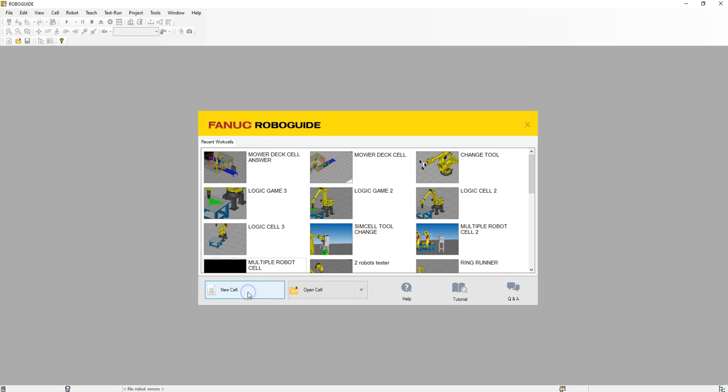But first I'm going to set up the cell, so I'm going to go to New Cell, and we're going to use Handling Pro. Let's call it Cell Creation Mower Deck. Pick your version that you want to work with. We're not going to work with any end of arm tooling, so set end of arm tooling later. Hit next.

Hit next on the servos, and next again, all the way to the finish and run through. Allow the teach pendant to initialize. When it gets to the flange selection, we're just going to do 1.

And allow the cell to set up. Alright, so in the link below, there's a link to the Google Drive. If you have not done so already, make sure you download all the CAD files, including the PDF that walks you through everything we do in this video. The link will take you to the CAD folder, just hold Shift on all of them, right click, and then download.

It will zip everything, and we want to make sure all these files go into the robot cells folder. So while this is zipping and downloading, I'm going to pause, and then I'll show you how to put it into the folder.

Once you have the cell downloaded, just unzip the folder, and then find the folder under your work cells of the actual name. So I named mine Cell Creation Mower Deck, and I'm going to paste this folder inside here.

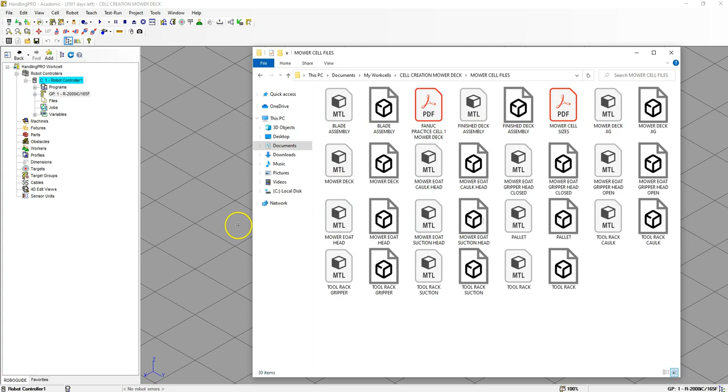Now I have my files, so this is all the files we need inside the cell. So walking through the PDF that we downloaded as well, we downloaded the robot, and now let's start moving into the parts.

First thing we're going to do is bring in the blade assemblies, and it's the same CAD file, but we need 3 separate ones because we need to pick and place 3 separate items: finish deck assembly, mower deck assembly, and the mower EOAT head, which will help us with the pick and place off of the tool rack.

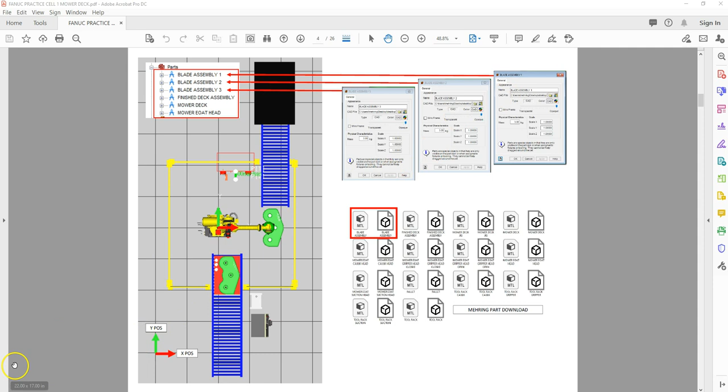So let's download those and add them to our parts file. You'll see inside our file here are all the weights. We're not going to do anything with scales or with color. The mass is 3 kilograms, and that's our blade assembly we're going to download.

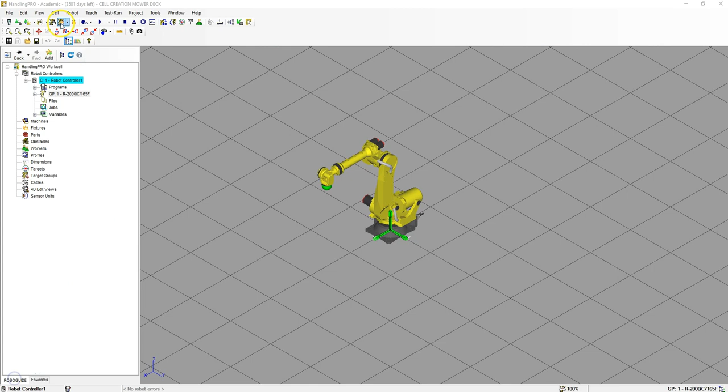Let's go inside here. We can either go up to Cell, Parts, or right click on Parts and Add Part, and we're going to go from Single CAD Library. Let's find our cell, and inside that cell go into the folder with our CAD files. Here's our finished blade assembly. Hit open, and you'll see our blade assembly.

Again, we're not doing anything with the scale, and each one of these weighs 3 kilograms. So we're going to call this blade assembly number 1, hit apply, and then let's do that 2 more times. Now we have 3 blade assemblies.

So the next part is the mower EOAT head. Again, we are not worried about the mass of this, this is just helping us for setup and placement.

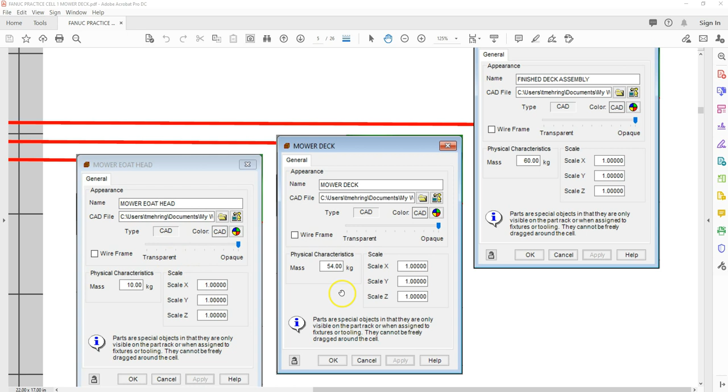Then we have the mower deck, which is 54 kilograms, and the finished deck assembly, which is 60 kilograms, because that's with all the additional items, including some bolts and caulk. So let's add these 3 items to our RoboGuide.

We're going to right click, Parts, Add Part, Single CAD Library, and we are going to go Finish Deck Assembly. There's our finished deck assembly with all the parts. This was 60 kilograms. Hit OK.

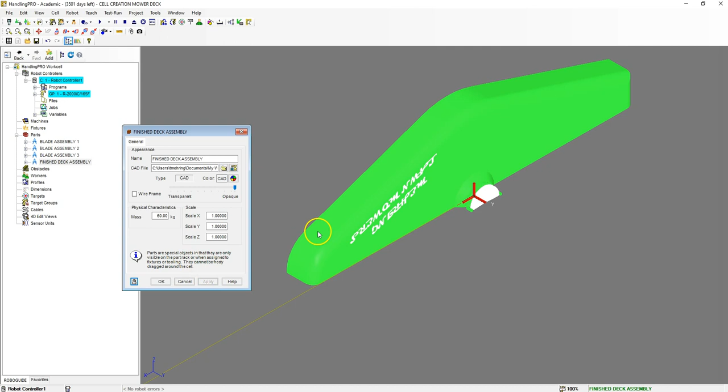Add Part, Single CAD Library, and then we're going to have the actual mower deck, and this is going to be 54 kilograms. The last one we're going to do is the mower EOAT head, so that's just the head by itself.

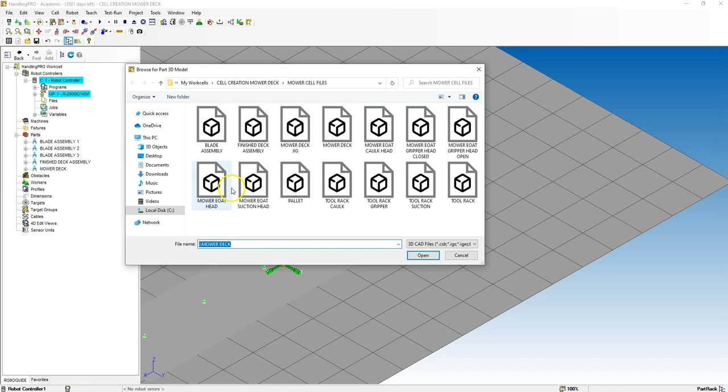By itself, again, we're not worried about the mass because we're only using this for setup and move to. Hit OK. So now we have our 6 different items all set up for our parts. So our parts now match the cell that you saw in the PDF.

Okay, next, I do not want to see all these off to the side. So if you double click the actual rectangle or square, this will pop up as the part rack. So we're going to uncheck visibility and we're going to hit OK. And that takes away the entire part rack. We don't need to see that.

Let's start adding the end of arm tooling. Let's hit the plus next to the R-2000iC/165F robot, find tooling. And our first tool is going to be just the gripper head. So we're going to right click on it. We're going to go EOAT1 properties. And the name of this, we're going to go no EOAT.

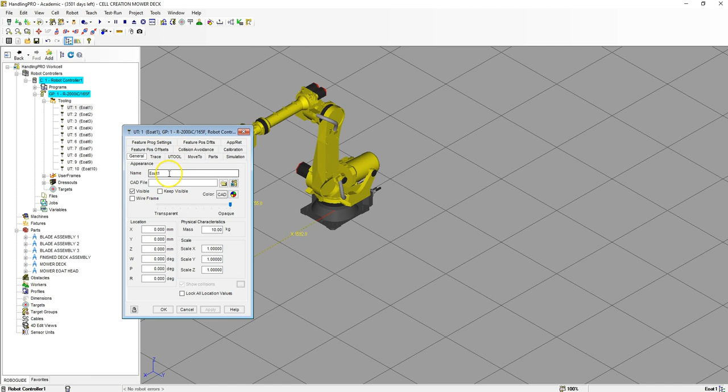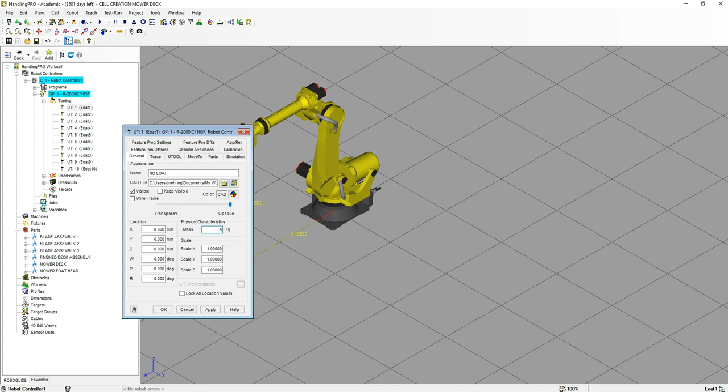And here's the CAD file. We're going to find the CAD file that we need. So this is going to be the Mower EOAT head by itself. And we're not going to do any of these items. The physical characteristics were usually right around 2-3 kilograms for the weight of this. It could be a little bit more for sure. We can just go 6 kilograms for this item. And when I hit apply, you should now see the EOT at the end.

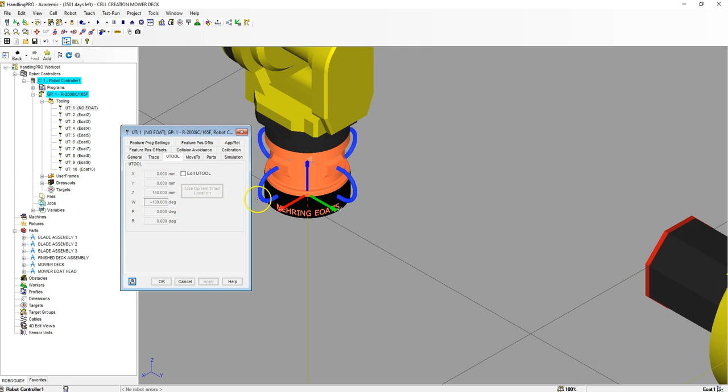Let's go to U tool. And for the U tool, let's go edit tool, and we're going to go right down to the bottom, which is going to be 150 millimeters. And then we're going to also rotate it -180. So now our X and Y matches the triad for the world mode as well. There's going to be no parts or simulation for this, so we don't have to worry about that. So now we have our head by itself.

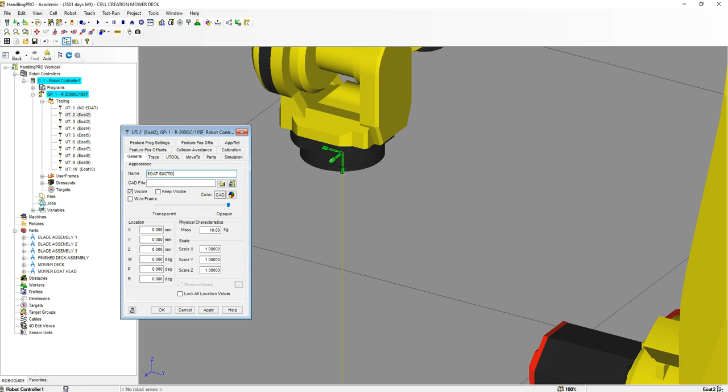So let's go to U tool number 2 and let's go properties. And let's call this one EOAT suction. So let's go to general. Let's find the CAD file and it'll bring us right to here. So we're going to go EOT and suction head, Mower EOAT, suction head. And when I hit apply, you should be able to see our item.

Let's go to U tool and edit U tool. The U tool Z is going to be 230. And we're also going to do that rotation of -180 degrees. And down there, we now have our rotation correct. Now it's off to the side like that because of how the mower deck is built and the weight of the mower deck. So it's not going to be exactly in line with our triad.

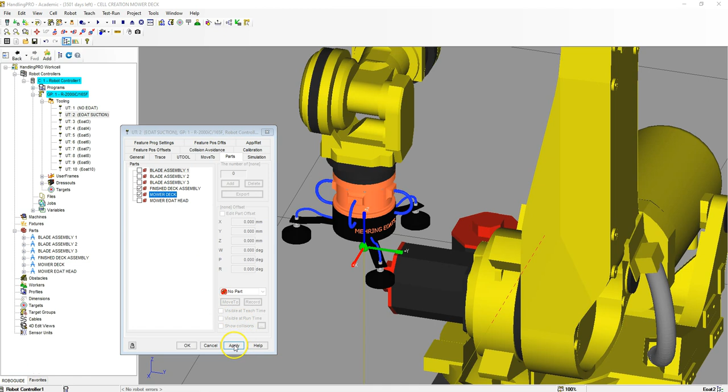Let's move down to parts. This one will be picking up parts. So we are going to pick up the finished deck assembly and also the mower deck with this. So with the mower deck, when we hit apply, we should see this. Now we need to edit this, so click it again, edit part offset. 230 is good. We need the W to be 90 and then the R to be -90 to get it to where we want it to be. And when I hit apply, we're good with that one.

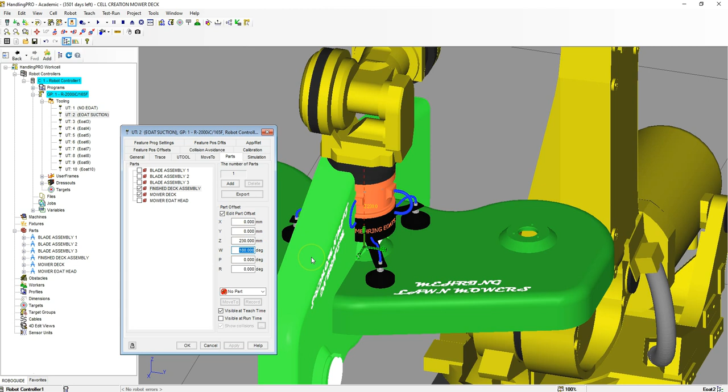Now let's do the exact same thing for the finish deck. So let's click the finish deck, edit part offset, and the exact same thing, 90 and -90. And because it's upside down, let's just rotate this 180 degrees. And then we're going to have to flip it so that it's not negative. And then it should match. So I went 230, 90, 180, 90. So just a positive 90 from what the other mower deck is.

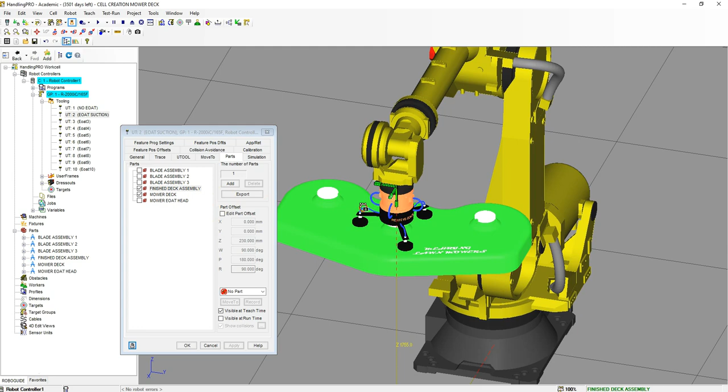So this is the one that is finished. So as soon as we start adding the parts, this is what's going to get picked up and put onto the final conveyor belt. Then both of these should be defaulted as visible at teach time, so just double check that it is. For simulation, we should not see anything else inside here. It's just a static tool. So let's hit OK, and this EOT is now set up.

Let's go to U tool number 3, EOT properties, and this is going to be our caulk gun. So let's go to general, CAD file, and we're going to go to EOT, Mower EOAT caulk head, and then we're going to change the weight to say 4 or 5 kilograms for the weight of our EOT, and when I hit apply, you should see it now pop up.

Next, let's go to the U tool, set up the U tool. Z is going to be 302.1.

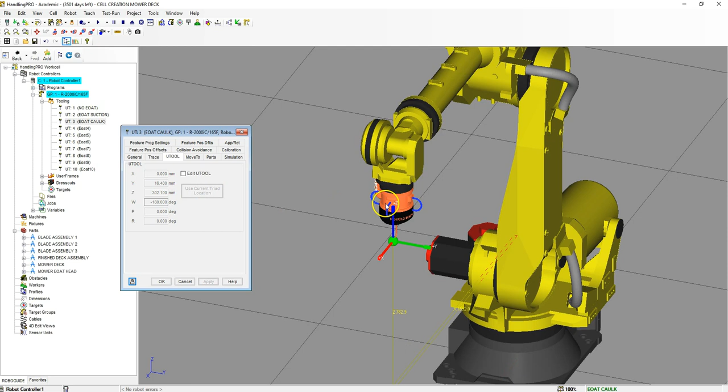The Y is going to be 16.4, and then we're going to have a W -180 degrees rotation. So now we have our U tool at the end where the caulk should be at, so we can run along the lines.

So we have our caulk gun. We do not have to do anything for parts. That's not picking up anything. It's just placing a bead of caulk, and also the simulation is not doing anything as well. So the caulk gun is now done. Let's now move on to the final one, which is the gripper.

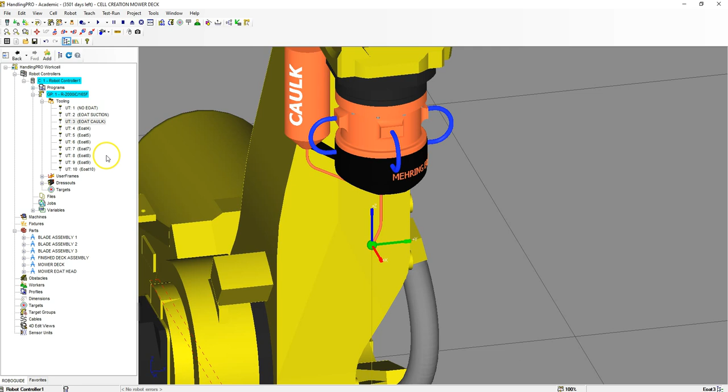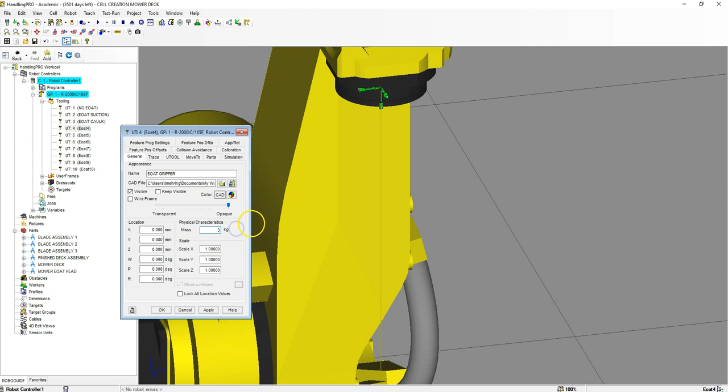So U-tool number 4, right click on it, and we're going to go EOAT number 4 properties, general, and let's call it what it is, EOAT gripper. CAD file. Let's grab the CAD file. Now there's 2 CAD files. There's one open and closed. So make sure you grab the open first. There's nothing for the size. This is going to be a little bit lighter, so we'll say 3 kilograms for that. Size is all good. We don't have to do any rotations.

Let's change the U-tool. Let's go to U-tool, edit U-tool, and we're going to have a Z of 181.515. And then for our rotation, negative 180 degrees, and now we have our rotation correct. X, Y, and Z triad is all correct as well. Let's move to the parts.

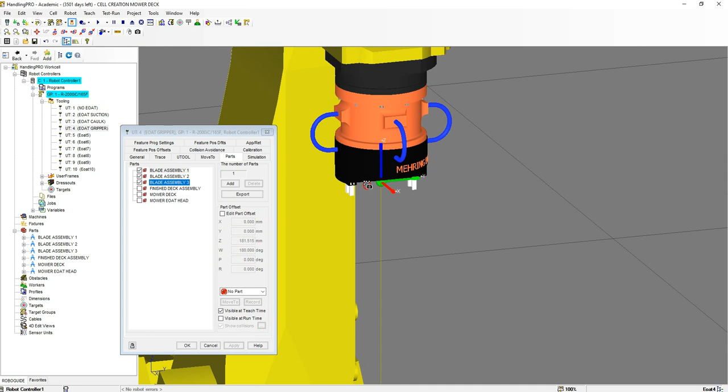Inside the parts, we are going to pick up all 3 blade assemblies, making sure that we hit apply on that. So we have all 3. Visible at runtime is unchecked, and we're not going to do anything with the edit offsets. So let's make sure that all these blade assemblies are zeros. So go inside here, 0, 0, apply, and now it's the correct direction.

Do the same thing for number 2, edit direction. Make sure that these are 0 all the way down, and you should be able to see it once you do that. So click assembly number 1 and go zeros all the way down. Blade assembly number 1, number 2, and number 3 should all be in the exact same place. All of them should say visible at runtime to be unchecked.

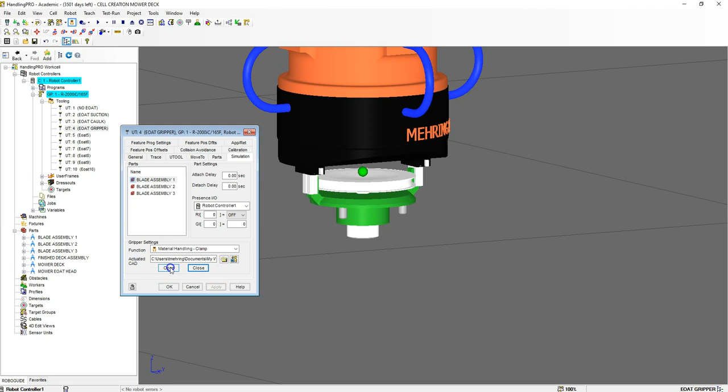And then we're going to go to simulation. And inside simulation, we are going to now switch this to a gripper style. So function, switch this to gripper, clamp, and then the actuated CAD file. We're going to go to closed EOAT, open, hit apply, and now I can go open, closed, open, closed. So they're 2 different CAD files, one open, one closed. And everything's set up on the simulation part. So hit OK, and now all our toolings are now all correct.

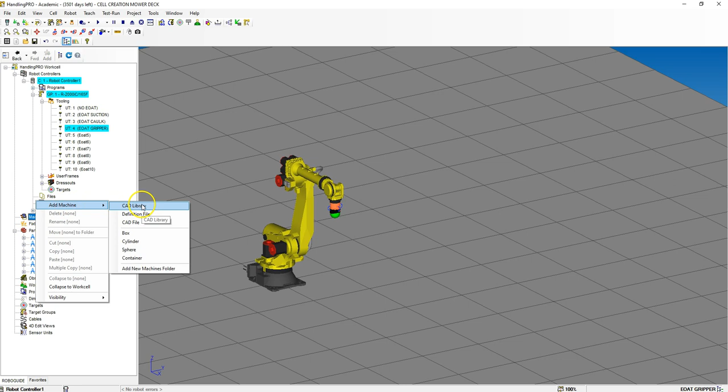Next, let's start on the machines. So we're going to add a machine. So right click on machines, add machine. Let's go to the CAD library, and we're going to find the conveyor belt. So it won't be under machines. We actually have to go under fixtures. Then go under conveyor, and it's going to be just the conveyor belt. Hit OK.

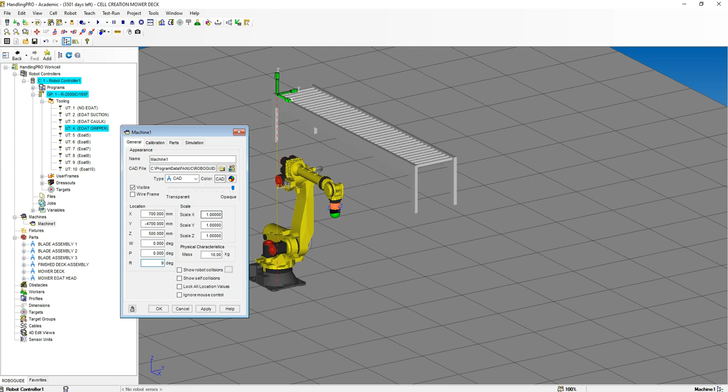And then let's change the location sizes. So X is going to be 700. Y is going to be negative 4,700. The Z is going to be 500. The W is 0. P is 0. And then R is 90. And when I hit apply on this, it should be in the correct area.

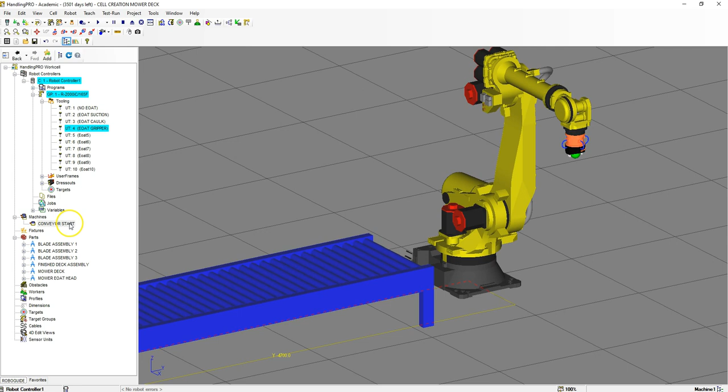Next, let's change the scale, and the Y scale needs to be 1.3 just to make it a little bit wider. And all these numbers should remain the same when we do that. Let's change the color of this to blue, and I'm going to hit apply. And now we have our piece in the correct area. We can lock all locations for this. And let's just rename it. So this is going to be our starting conveyor. We'll come back and add the actual machine parts that move after we get all the machines loaded.

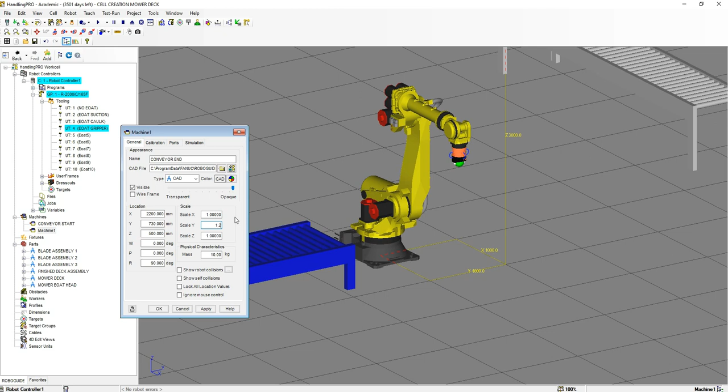So let's add another machine. This one is going to be our end conveyor. So let's go to fixtures and find our conveyors. There's our CNVYR. Hit OK. And let's put in the correct sizes and the name. So we'll just go conveyor end, and we're going to go 2200, 2200, 730, 500, 0, 90, and we're going to go scale of 1.2 for the Y. And when I hit apply, it should be in the correct place.

And then let's change the color to blue as well. And we'll lock locations and values. Okay. So now we have our second conveyor. Now we need to put in our parts rack.

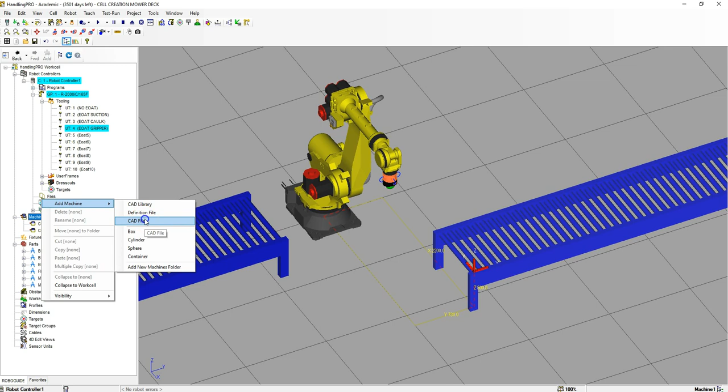So let's add another machine. And this one I'm going to go to CAD file, and I'm going to find my tool rack. And we're going to put in the X of 550, Y of 1800, Z of 0, W 90, and everything else is good. Mass doesn't matter. And CAD color can work. Lock location values and hit OK.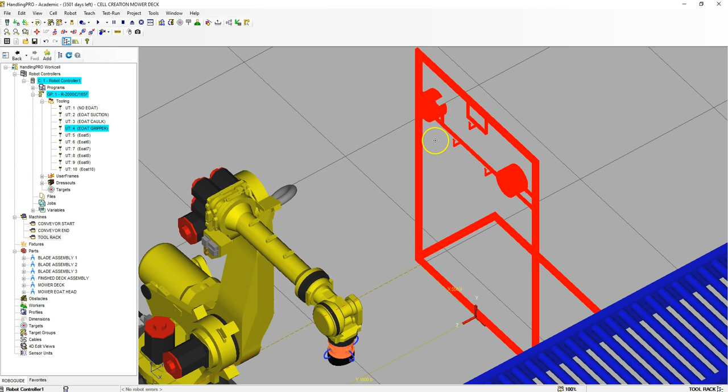So now that we have our machine fixtures, anything that needs to have moving parts needs to be a machine. Fixtures is just an item that is stagnant. If we want something to move down a conveyor belt, it needs to be a machine. If we want to have a tool show up or disappear, it needs to be a machine. So it has to be associated with a machine. We will add the links to these machines after we add the fixture parts.

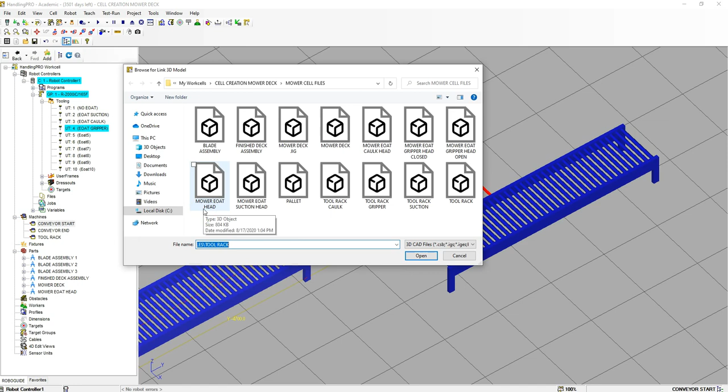Now that we have our machines in, let's add our parts that will actually move on the machine. So let's go to Conveyor Start, right click on it, add link, and this is going to be a CAD file. And we are going to find the pallet. So here's our CAD file. We want to make sure that this is the X-axis when we rotate this. Let's call this pallet.

Hit apply. For our general, these are all going to be zeros. Okay, so this is not associated with the rotation of this, so don't get used to the general. We actually have to go to the link CAD to modify the rotation of that. So let's go to link CAD.

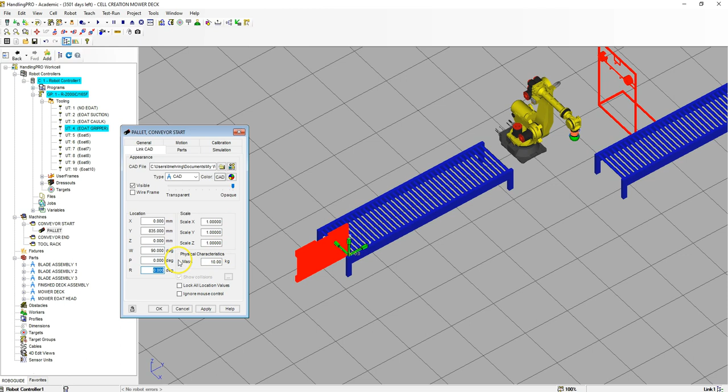And then let's go down. The X is going to be 0, the Y is going to be 835, Z is going to be 0. Rotation on the W is going to be 90, 0, 0. And when I hit apply, now it should be the correct rotation.

Let's add our link. So we're going to go to parts, and we're going to have blade assembly 1, 2, and 3, and then the mower deck. So let's do the assemblies first. I'm going to go to blade assembly number 1, and these are going to be our numbers: negative 140, 290, 72.5, 90, 90, 0. When I hit apply, it should be in that first correct part.

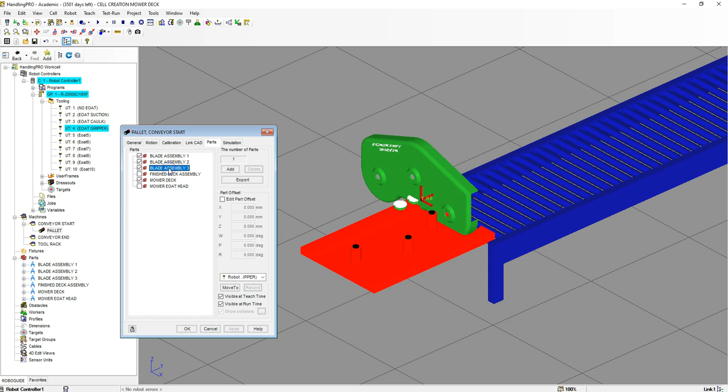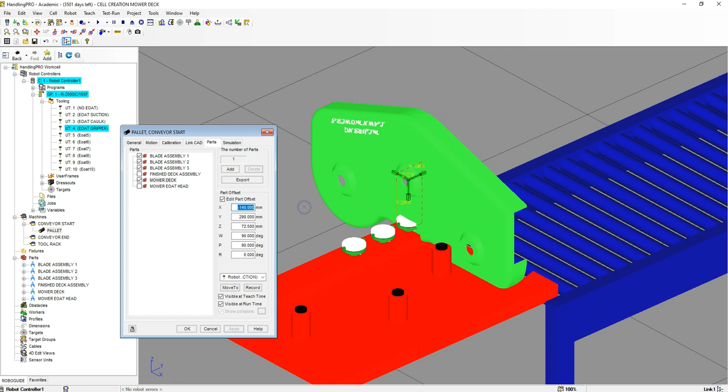So now let's go to apply, mower deck. Let's hit the edit offset, and the mower deck is going to be negative 616.95 for our X, 120 for our Y, and 533.050 for the Z, and then we're going to have 180, 0, 0. And then it should be in the correct place. And we're going to hit apply. And these are going to be visible at runtime for all of these.

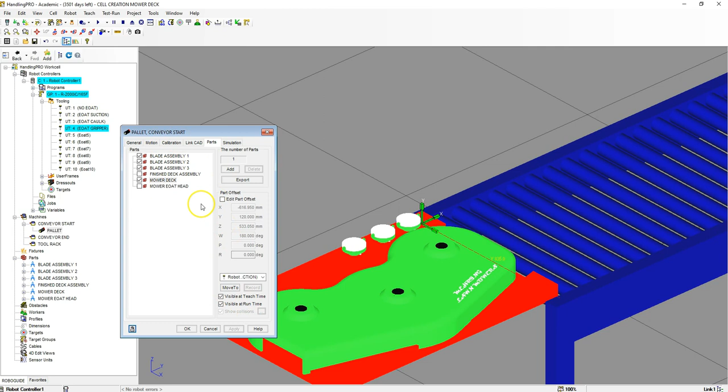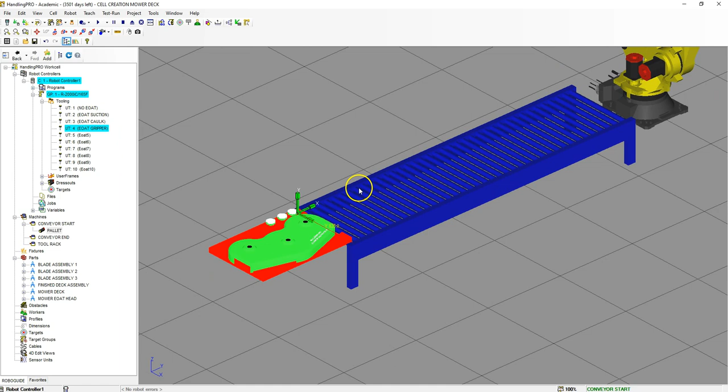And then all of these are going to be picked up. So let's go to simulation and make sure that all of these are going to be picked. So pick, pick, pick, pick, and we're going to hit apply. So all of them should be allowed to pick up, not to be placed. Hit OK. So now this assembly is correct. Now that we have the simulations done, which is allowed to be picked, let's go to motion.

And inside motion, we're going to do an in and out control linear, and the speeds are going to be 500 going towards, and then it's going to warp back. So we're going to go the largest number we can. And then we're going to go to robot controller number 1. And these are going to be our I/O tags.

So it's going to be digital output number 1 and digital output number 1. One is going to be on, one is going to be off. So when it's on, it's going to be at 1230. And then when it's off, it's going to be at 3800.

So you can test where these locations are. There's the location. There's the location. Now what we need to do is add our inputs so that when it is in location, it will tell us when it's in location. So digital input number 1, digital input number 2, when it is at 1230, which makes sure it double matches here, it's going to turn digital input number 1 on.

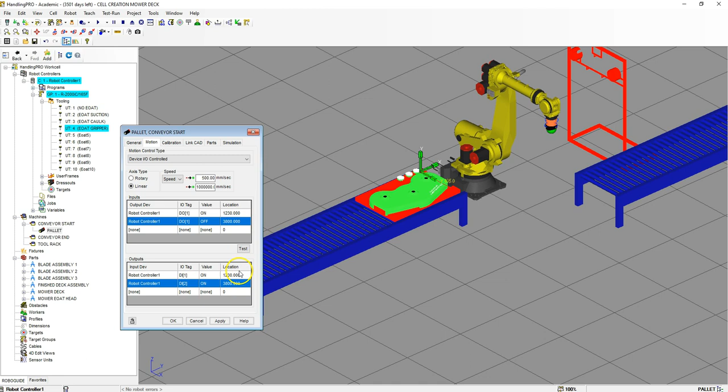When it's at 3800, it's going to turn digital input number 2 on. Make sure these numbers match. If they don't, then nothing will ever get right. So we're going to hit apply, and now we have our motion. So now that this conveyor is good, let's move on to the next conveyor.

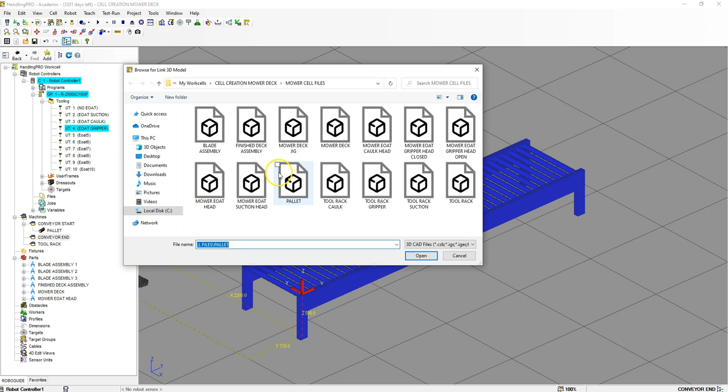So I'm going to go conveyor end, right click on it, and we're going to go add link, and we are going to go add CAD file. And this is going to be our last finished mower deck assembly. So finish mower deck assembly, open. So there's our mower deck assembly. Let's go to general. We want to make sure that this is the x-axis that is moving down. X-axis moving down. Let's call this deck or finished deck. Hit apply. So we have finished deck, x-axis.

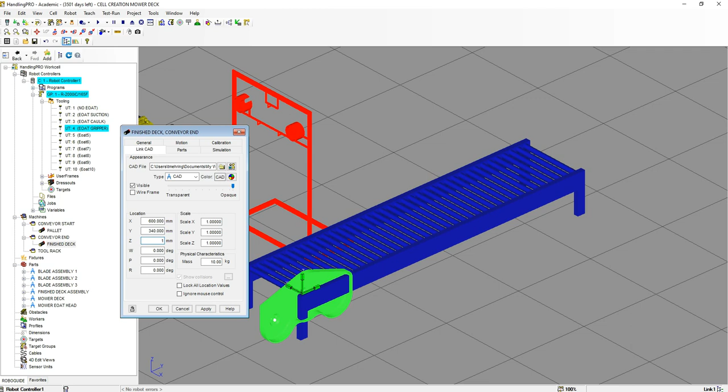Then on the linked CAD, here's the file, and here's where we're going to change the location. So this is going to be 600, 340, 100, and 90, 0, 0. Scale is going to be normal. Mass is going to be just fine. We're going to hit apply, and now it should be in the correct place.

Now, because this is an actual movable part, it's not a linkable or droppable part, what we need to do is go to parts, and we're going to go finish deck assembly, hit apply, and then there's the finished deck assembly. It's there, but you just can't see it because it's overlaying the other part. So there's actually 2 decks here, even though it looks like just one. If I move it, you'll see both the decks there.

So then we're going to go to simulation, and we're going to click finish deck, and we're going to be allowed to be placed. So uncheck the item there, hit apply. Then we're going to go to motion, and then we're going to add our device I/O. Linear motion, speed is good, and the speed is going to be 500 going the opposite way, and then we want it to warp into place. So we're going to go the max number.

There's our max number. This is going to be digital output number 5. So I'm working off of the PDF right now. Digital 5, digital 5. One is going to be on, one is going to be off. So when it's at on, it's going to be at 2600. When it's off, it's going to be at 0.

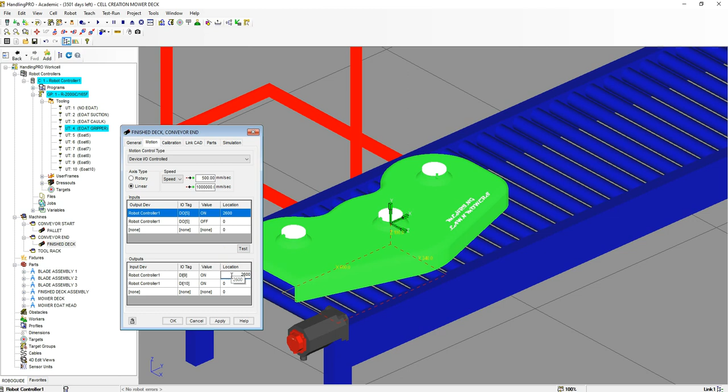So let's go down here and let's add our robot controller 1. And this is going to be digital input number 9. And then digital input number 10. When they both are in those places, we're going to have on and off. And our location's at 2600. Make sure these 2 match. Make sure these 2 match.

We can go in there, we can test. So here's the test, all the way down at the end. Test here is 0. So we're all good for our conveyor belt number 2. Hit OK. Now our conveyor belt number 2 is done, so the last item is going to be our tool rack. I'm going to right click on this, and I'm going to go add link, CAD file.

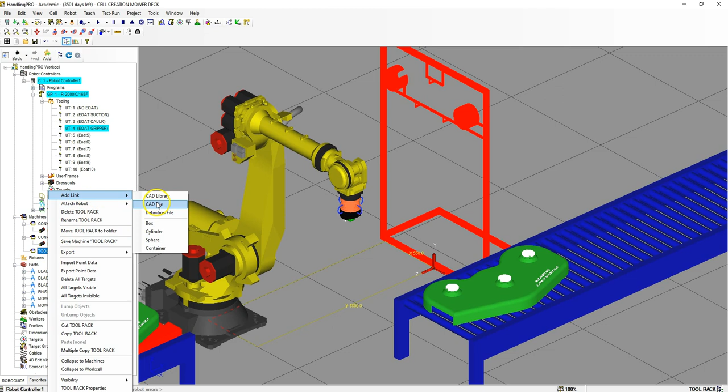And the first one we're going to bring is the caulk gun. So we're going to go the caulk tool rack. So tool rack, caulk, open. And there's the caulk gun. Let's modify the placement of this. So let's go to general and make sure these match. So I'm going to change this to caulk. And this is going to be the y-axis. Hit apply. So we have y-axis, caulk.

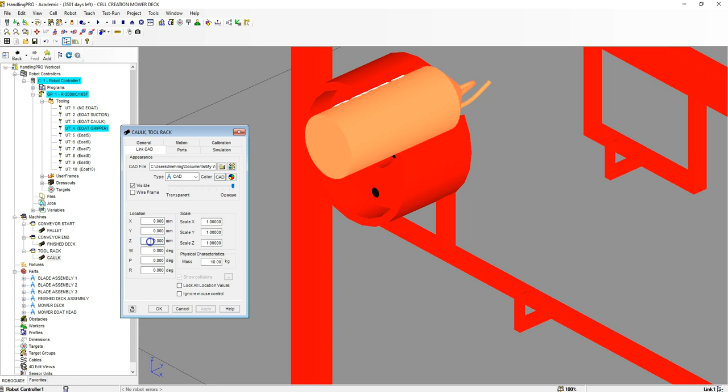Then we're going to go to the linked CAD. Again, the file's already been loaded. Here's going to be the z-axis, which is going to be 65. And then it should move out to the correct position.

Now, to allow us to easily align our head to this, we're going to go to parts. And this is why we brought in the Mower EOAT Head as a part. So I'm going to hit apply on this. And then we're going to edit the part offset. And then we're going to change this to -400.

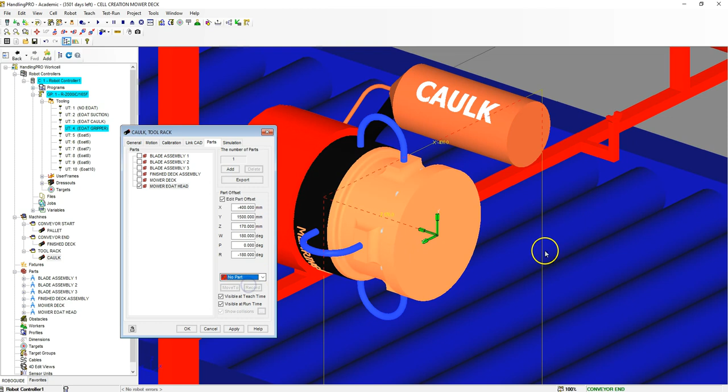1500, 17, 170, 180, and then negative 180. So now we have the head here, which now we can go move to. So we can go in here, we can move to this placement here. And once we have that set up on our actual robot, go to simulation and Mower EOAT.

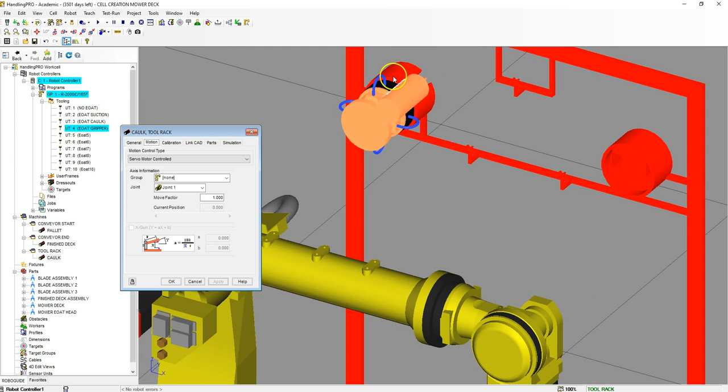We're not going to pick up or place on this. So now that we have the simulation done, let's go to motion. So what's going to happen now is we're going to come in here, we're going to grab it, and it's going to warp below the ground. Okay, so it's going to make it look like it's not there anymore on the tool rack. And then as soon as we release it onto the tool rack, it's going to show up.

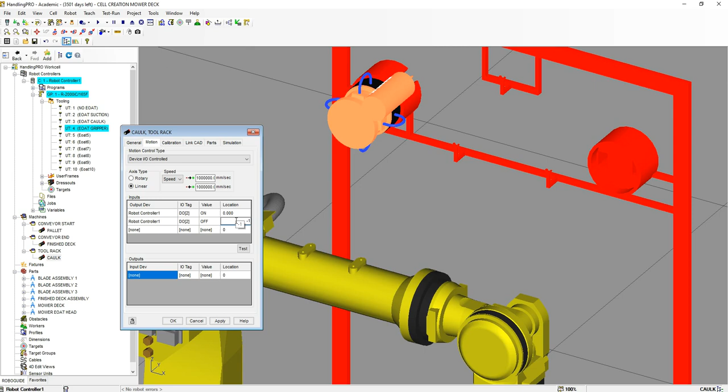Okay, so let's go to motion and let's go to device in and out, linear, speed is going to be as fast as we can. Warp in and warp out. So there's not going to be any motion pretty much there. So we're going to make this digital 2. One's going to be on, one's going to be off. Okay, so 0 means it's on. That means the tool is present. When it is off, it means it's going to be underground. So you can see right now it's underground when it's off.

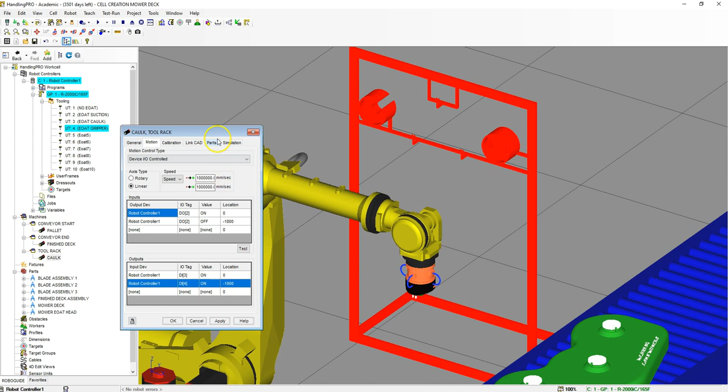So I'm going to do the ins and outs then. So this is going to be digital number 3. And this is going to be number 4. So when both of these are on, it will give us a signal saying that it is there. Okay, so the last thing we want to do is let's bring it up to the top here. So test. There we go. We're going to hit apply. So it's test, and you also see the head.

So let's go back to where it says parts, and where it says Mower Head here, we're going to turn off the visibility for both the teach and also the runtime. Hit apply. So we don't see the head, but we can still move to it. Okay. So once we have that, we're going to add another link, and we are going to go to CAD file, and we're going to add the next CAD file, which is the tool rack suction. There's our tool rack suction. Let's go to general. Make sure the general is all good. So it's going to be the name suction.

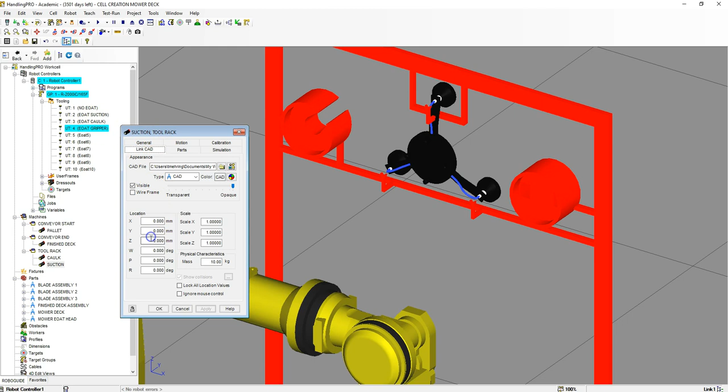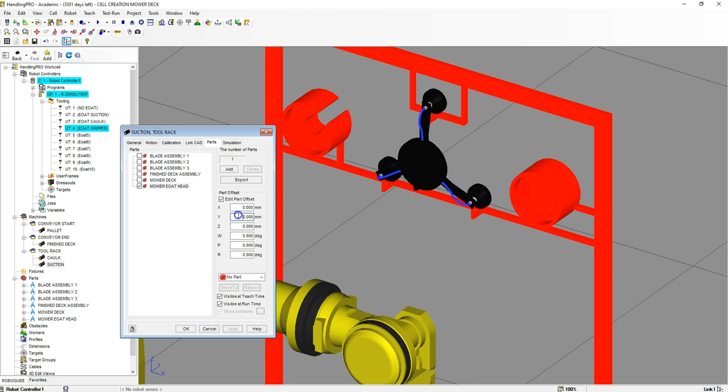And then we're going to go down the y-axis as well. Go to link CAD, and here's where we're going to change the offsets. And Z is going to be 50, and it'll be in the proper place then. Everything else should be good. Next, let's go to parts, and same thing as before. Let's add the mower head, make it easier so we can actually move to it. Hit apply, click it again, edit the offset, and let's change these numbers. So this is going to be 1500. Z is going to be 185. The W is going to be 180. The P is going to be 0, and then the R is going to be negative 180. So it's in the proper place and all correct.

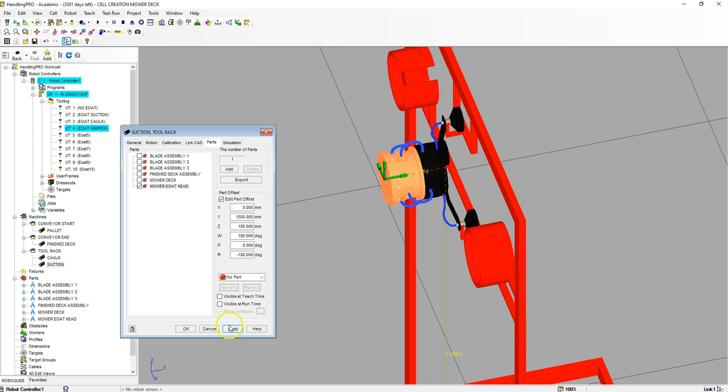Then we're going to turn the visibility off for these. Hit apply. Simulation, we're going to click the mower head, and this is not going to be picked or placed. It's just meant for grabbing the correct position with our end of arm tooling. It's just easier to do it that way. So now that we have all those correct, let's add the motion. And it's the same exact motion. And this is going to be our digital 3. One's going to be on, one's going to be off. The off is going to be below the ground, which is negative 1800.

And let's do the same thing for the digital inputs. So 3 means that we're going to be using digital input number 5 and digital input number 6. When both of these are on, it's going to send a signal over through our digital inputs 5 and 6. Hit apply, now we're good. So one is going to be below the ground, one is going to be above the ground. So when we test, should be below, above. When we test, should be below. Hit OK. And the last one is going to be our gripper.

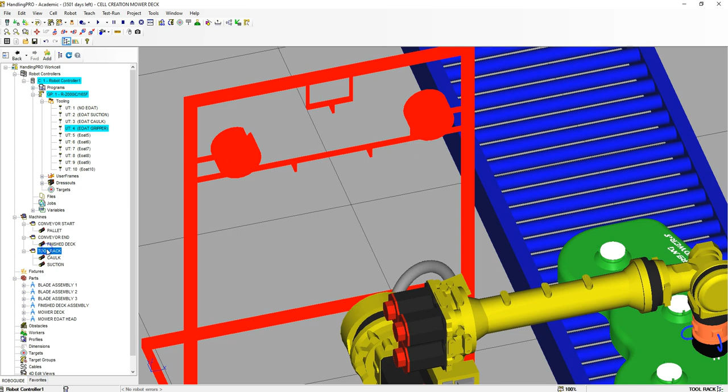So tool rack, right click, add link, CAD file. And we're going to go tool rack gripper. Open. Let's go to General, and let's name it Gripper. And this is going to be our y-axis. Hit Apply. Link CAD. And let's change our z-axis offset to 50. And now it's in the proper place. And everything is good on that point. Then let's go to Parts, Mower EOAT. Hit Apply. Click on it again. Edit Offsets. And let's change the numbers again.

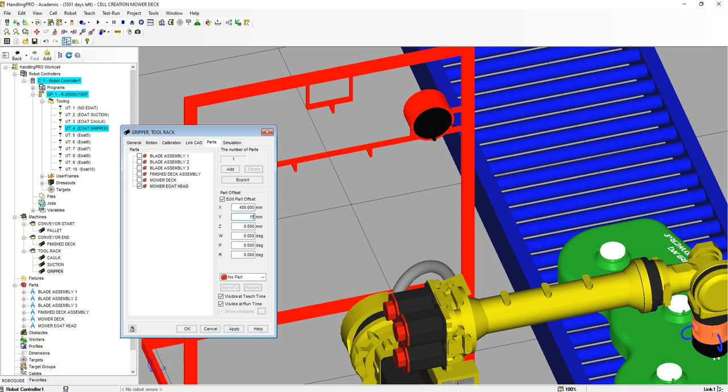400, 1500, 185, -180, 0, and 180. There we go. And we have it in the correct position. Turn off the visibility. Hit Apply. Simulation. Mower. Uncheck the pick and place. Hit Apply. Motion. Move to the in and outs. Linear. And top speed as fast as we can.

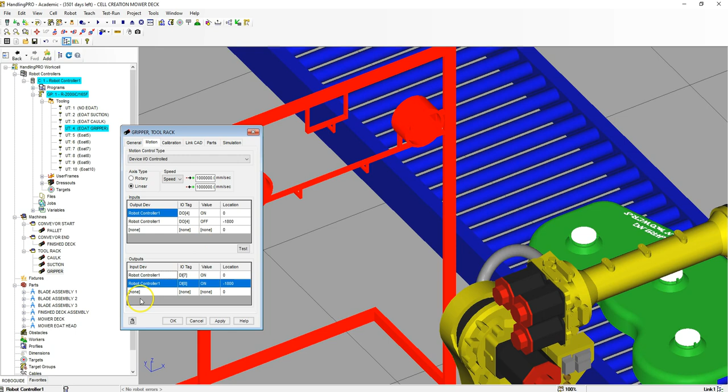And this is going to be digital output number 4. Since we're using number 4, that means we're going to be using input number 7 and 8. One is going to be on, one is going to be off. And this is going to be our -1000, and this is going to be our -1000. So make sure both of them match. If they don't, you will have a headache later on.

So now that all these are good, we are now good and set up with our machines. So the last thing we're going to do with the machines here, let's add the EOAT to the top here for our head. So we need to add the part to this single end EOAT.

So let's double click U tool number 1. And let's go to Parts, and let's go to Mower Head, hit Apply, and we're going to have to do some rotations on this. So let's click the part and then Edit, and let's change this from 180 to 0, and then change the Z offset to 0 as well. And then you'll see that it matches this exactly. So let's turn off this visibility at teach time as well as the visibility at runtime.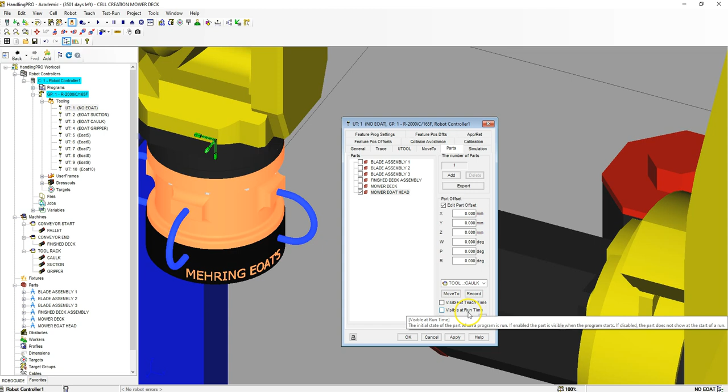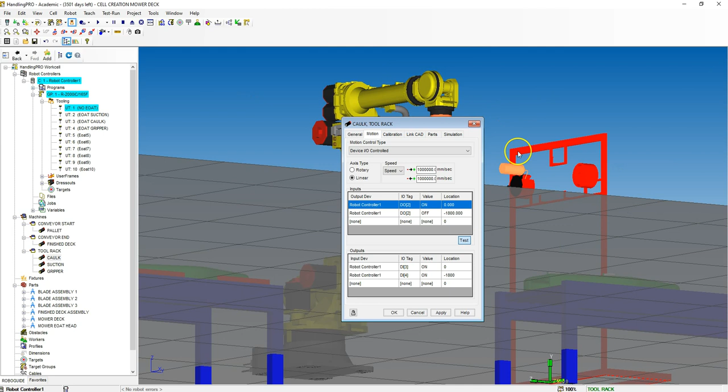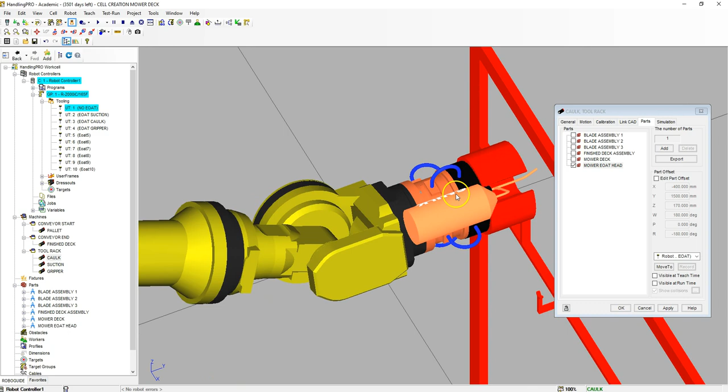Hit Apply. So now what that allows us to do is we can actually go to these positions here. So I can click my end here, and I can go up to Test and move it up to the top. Then if I go to Parts, notice how we have our robot arm now. Because we have that set up, I can go Move To, and there we go. Exact placement. So that's why we added that end of arm tooling as a part as well, so that we can easily move to each one of these positions without trying to figure out where the actual position is in X, Y, and Z location.

Next, let's add the obstacles around this. So it's going to be the fences and everything else. I'm going to right click on Obstacles, add CAD library. And the first obstacle is going to be our operation panel. So we're going to go to Operators, Operation Panel number 1.

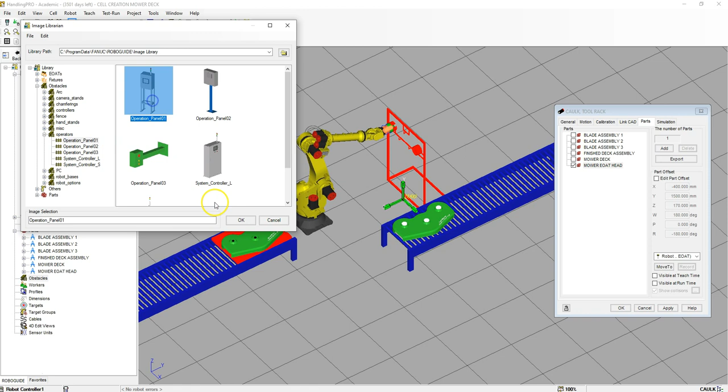And let's change the sizes here. So the X is going to be 1200. The Y is going to be -2350. Z is going to be 0. And we're going to be 0, 0, 0 for the placement. And let's do a rotation of 90 on the R. So we have our location of our panel now. So we can do a lock location now. Hit OK. So we have that now in place.

Let's right click, add obstacle, CAD library. And we're going to go to controllers, and we're going to go down to RJ3B. And this is going to be 1600, -3500, 0, 0, 0, and -180 degrees. And it should be right next to our library here. We're going to lock that value, hit OK.

And then we're going to start adding the fences around. So we're going to add another obstacle, CAD library. And we're going to go to fence, and this one's going to be the W100. Here's the W100. Hit OK. And location is going to be 2420, 2100, 0, 0, 0, and 180 degrees. No scale factors. Lock location, hit OK. So it's a tiny little area right here.

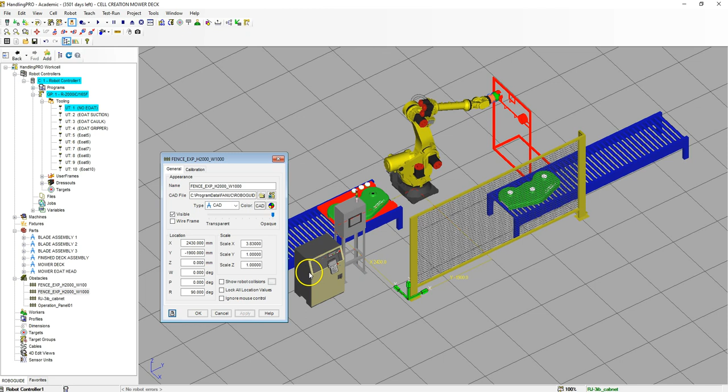Let's add the next fence. Add obstacle, CAD file. And this is going to be the 1000. And the sizes is 2430, negative 1900, 0, 0, 0, 90. And when we hit apply, it'll be right here, and then we have to change the scale factor on the X direction of 3.83. And then it'll go all the way across. Lock that location values, hit OK.

Let's add our next fence. Add obstacle and CAD library. And let's go to the fences. And the next fence is the 500. Put in the sizes, 800, negative 1900, 0, 0, 0, 0, all the way down. Make sure that the Z is 0 as well. Scale factor should be 3 in the X direction. Lock location, hit OK.

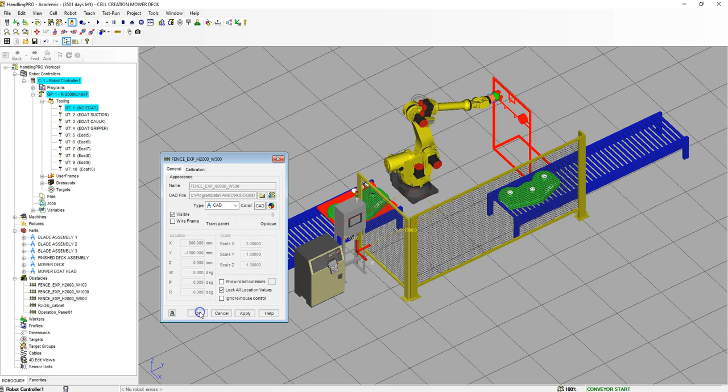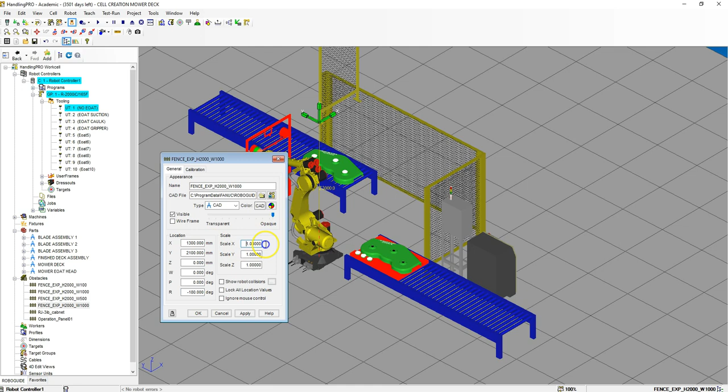Now let's add the back area. So let's add the last 3 fences. So this is going to be the 1000 fence. And it's going to be 1300, 2100, 0, 0, 0, negative 180. And then scale of 2.7. Back one. Lock location.

2 more fences. This one's going to be the 1000.

And size is going to be negative 1556, negative 1900, 0, 0, 0, 0, 90, and when I hit apply, should be in the correct location, and then the X direction is 3.83. Goes all the way across. Lock location, hit OK. Last fence.

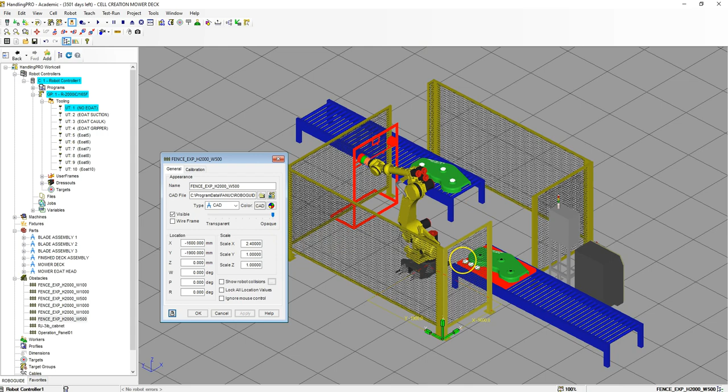And this one is going to be the 500. X location, negative 1600, negative 1900, 0, 0, 0, zeros all the way down. And then the X direction scale is going to be 2.4. Should be perfect on this side. Lock location, hit OK. So now we have our obstacles.

We need one last thing on the end, which is going to be just a black box to hide our end where our finished pallet goes into. So we're going to go to obstacles, right click, add obstacle, and we're going to just do a simple box.

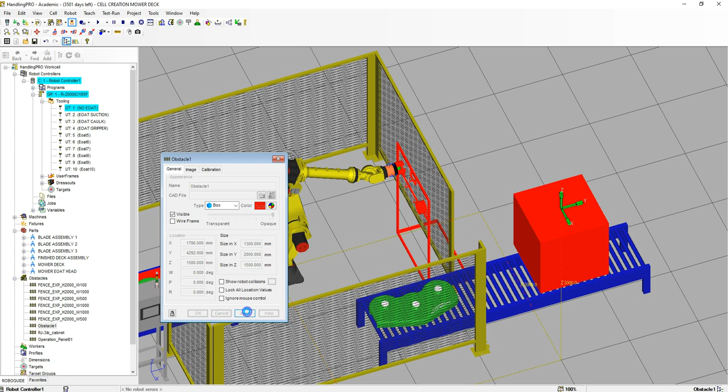And the box dimensions are going to be location 1790, 4292, 1500. Okay, and then the size of this is going to be 1300, 2000, and then 1500. And when I hit apply, should be at the end. The correct size. Let's change the color to black.

And we're going to lock location. Hit OK. So that is where our finished mower deck goes into. So that's going to be obstacle number 1.

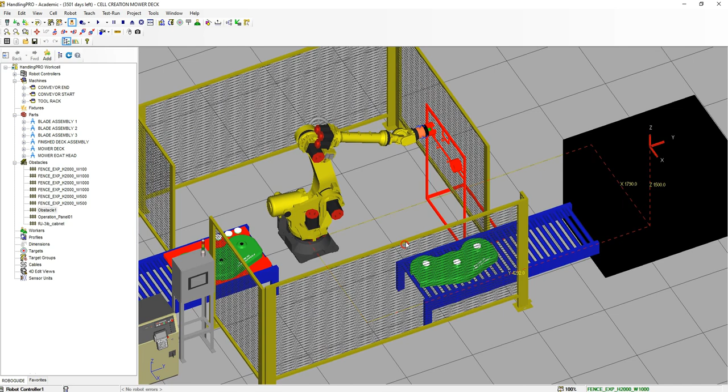All right, so the last thing we're going to do is going to add the fixture. So let's go to Fixtures, right click, and we're going to add fixture, single CAD library, and we're going to do the mower fixture. So the mower deck jig, open.

And here are going to be the sizes. We're going to have 1800, 0, 900, negative 90, 0, and 90. Hit apply. And now we have our mower jig here. We're going to lock that location, hit apply.

Then we're going to go to parts, and here are going to be the parts we need. We need the blade assembly number 1, blade assembly number 2, blade assembly number 3, finish mower deck, and then the mower deck. So all of the items except the mower EOAT head.

So let's go apply. Then let's go to blade assembly number 1, edit part, and it's going to be 0, -240, 0, -90, and 90. So you should see it move kind of in this correct place here. Hit apply. Then let's go to the blade assembly number 2, edit part, and this is going to be

387.692, -240, 161.538, and -90, and then 90. Hit apply. Then we're going to blade assembly number 3, edit part offset, and this is going to be

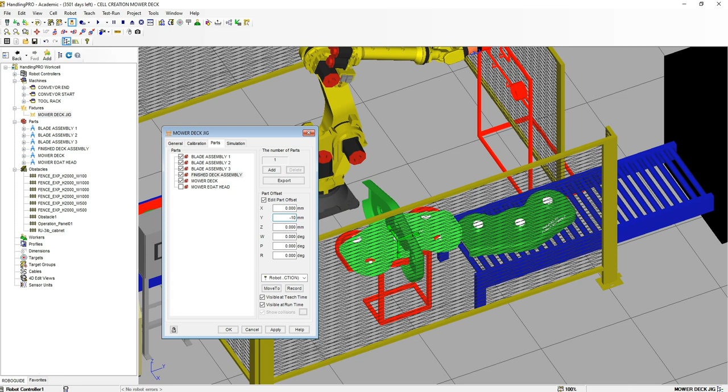Finish mower deck is going to be 0, -10, 0, 180. Correct place. And we're going to turn the visibility off on both of these.

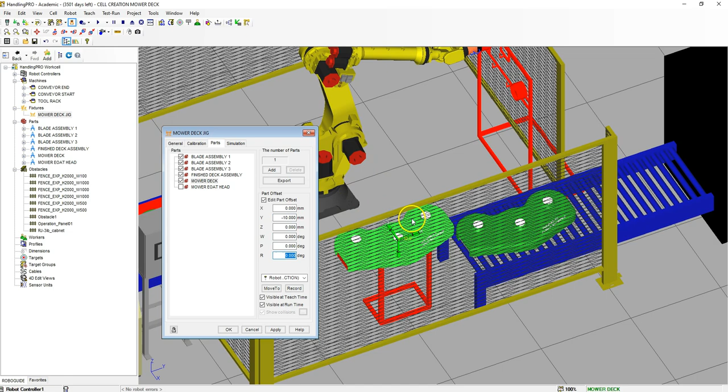Hit apply. Mower deck, edit. This is going to be 0, -10, 0, 0, 0. So now you should see all the items in the correct place. Hit apply. Now we need to make sure that all the visibilities are correct.

So let's go to blade assembly number 1. We should only see this during teach time, not run time. Hit apply. Same thing with assembly number 2, not during run time. Assembly number 3, not during run time. The finish mower deck should be both turned off. And then the mower deck should be visibility at runtime as well.

Checked. Hit apply. Then let's go over to simulation and blade assembly number 1. We're going to uncheck parts being picked, allow it to be picked, and then we're going to put 32.42. And I'll show you how to get this number when we actually start programming. So right now, just put in the number that you see here. So blade assembly number 2, 23.3.

Assembly number 3, uncheck that. And we're going to go 14.02. Finish mower deck is going to be allowed to be picked. And it's going to be after 129.

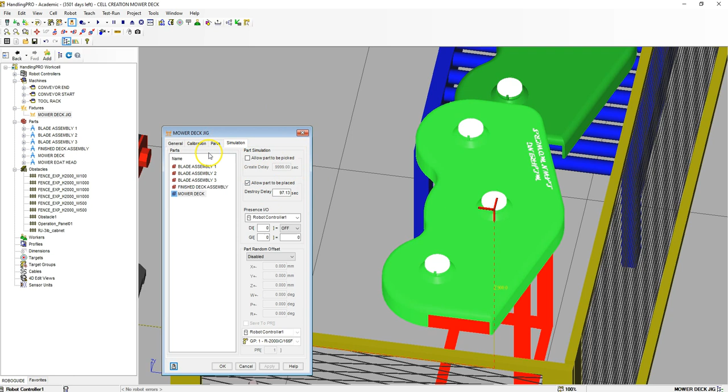And then our first mower deck is going to be unchecked, allowed to be picked. It's going to be placed, and it's going to disappear after 97.13 seconds. Hit apply. And again, I'll show you how to get this number when we start programming. So right now we're just setting the cell up. So we got the general, parts, and simulation all good. Hit OK. And now we have the entire cell set up.

So the next video we'll start programming.